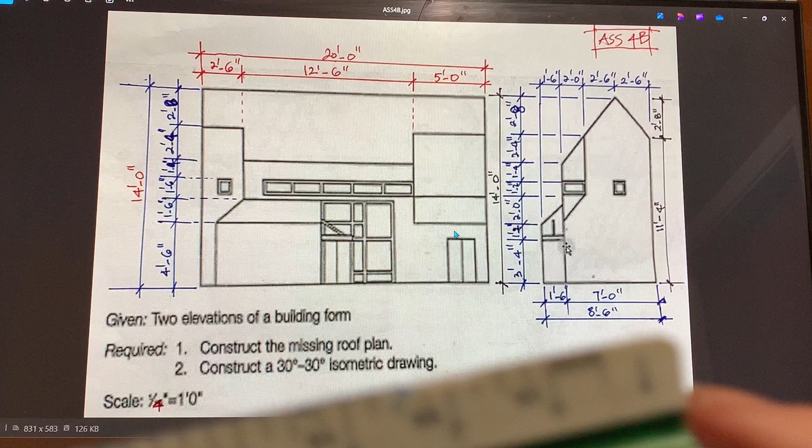This homework we need to use for the scale we want when you draw or measure. So I hope that you still remember the scale 1/4. When you see 1/4 at the top, this is 1 foot.

So now if you look at this is 1 foot, follow this one to read the number in feet. And if something is not an even number of feet, you can use the divider right here to measure the inches. 1 foot equals 12 inches.

You see the long dash and the short dash stand for inches. 1, 2, 3 inches, 1, 2, 3, 1, 2, 3, until 12 inches. 1 foot equals 12 inches.

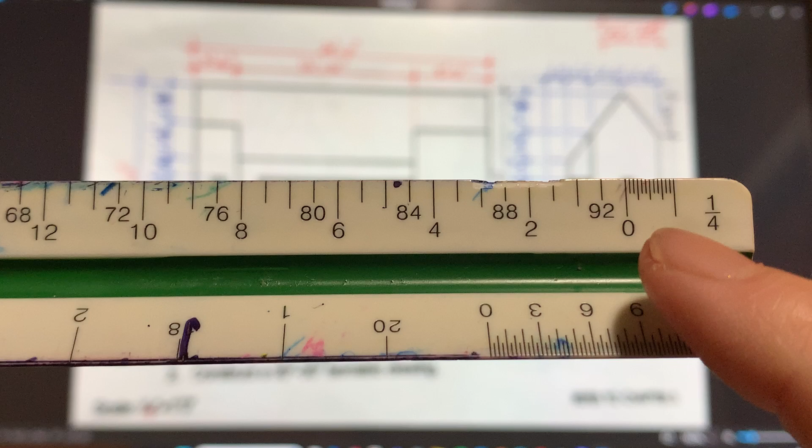And this homework we use the 1/4 scale to measure and draw. So first of all, you need to measure all of them from the scale 1/4. You need 2 parts: the first one, they ask you to create the roof plan, and the second one you draw with isometric at 30 degree.

So that's why first of all they give you the front elevation and the side elevation. You need to measure each of them before you start the roof one, like homework number 2. So you need to create the roof plan.

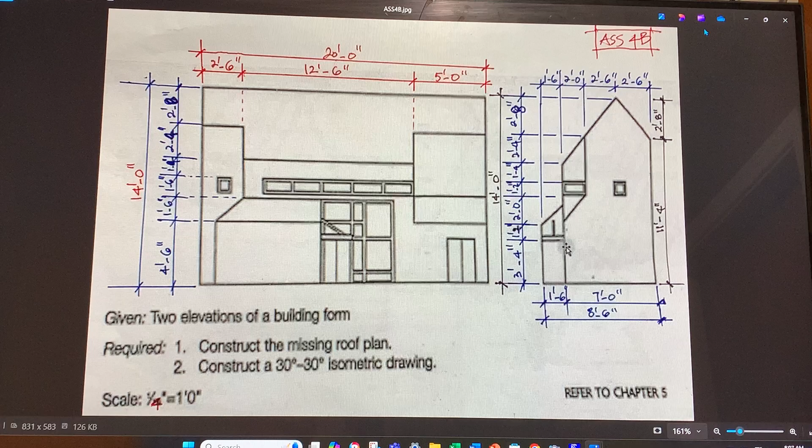So on the dimension right here, you need to measure with scale 1/4 like I told you. And you need to write it down to make sure that you use this one for reference when you draw the roof plan and the isometric later.

So now first of all you need to draw the roof plan. I have information for you on how you do the roof one like this.

Okay, so after you have the dimension, you can create the roof one on the top. I gave both of them so you can see the roof one at the top, and this is the one they give you. After you have the dimension, you use that dimension to draw this one.

For example, the longest one is the roof, and you need to draw the roof right here with the longest one. After that, from the side one, you can follow this one to do the side, the top ridge right here. That's it, the top ridge right here.

And after that, divide the 2 small ones. This is divided into 2 small ones. If you stay here to look at this side, you can see the top ridge right there.

And after that, slope down. Slope down here, and another slope down, another slope down, and go straight with the wall right here, go straight.

And this one is the part, when you stay here, you look at this part right here on the side. Okay, so this is the side one, and then in the front one, you can see the slope right here. So you see the little bit of gap right here from the first one right there.

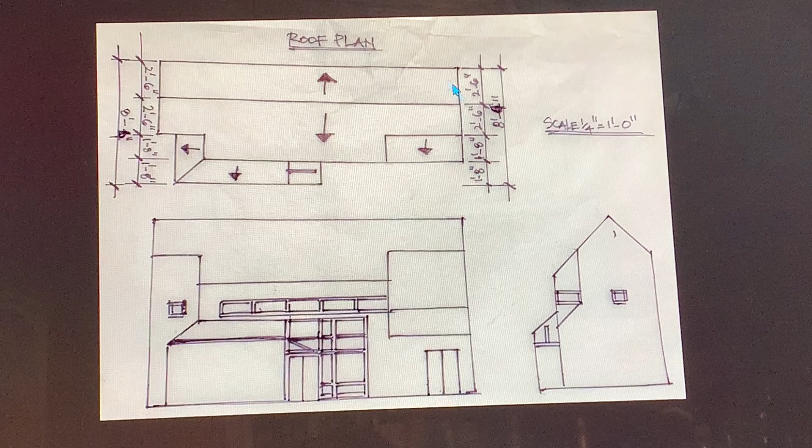Okay, so this is the second one you need to draw. Now we need to go step by step. After you finish the roof one with dimension right here, you go with step 1 like before, you create this. You need to do for step 1. Step 1 is the one like I told you, you need to create the dimension, 3 side dimension.

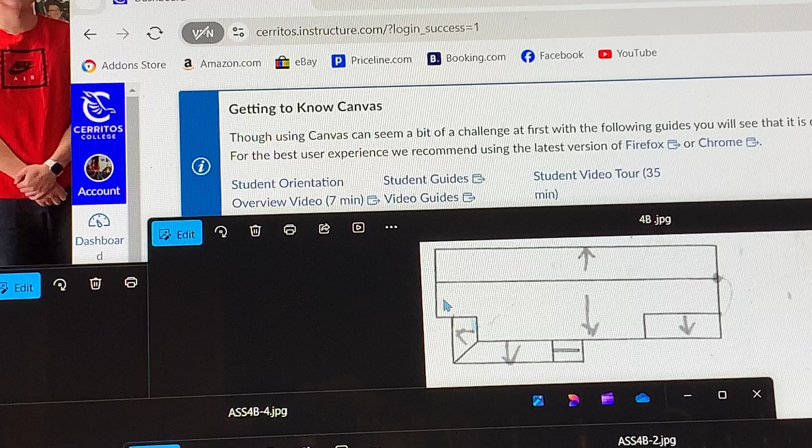Let me see. First one, you need to create 3 side dimension like this. That means you need to create horizontal line, vertical line, and after that the angle line with 30 degree. That's the first one, 30 degree left or right. This one. After you create for horizontal, vertical, and after that you create for this one.

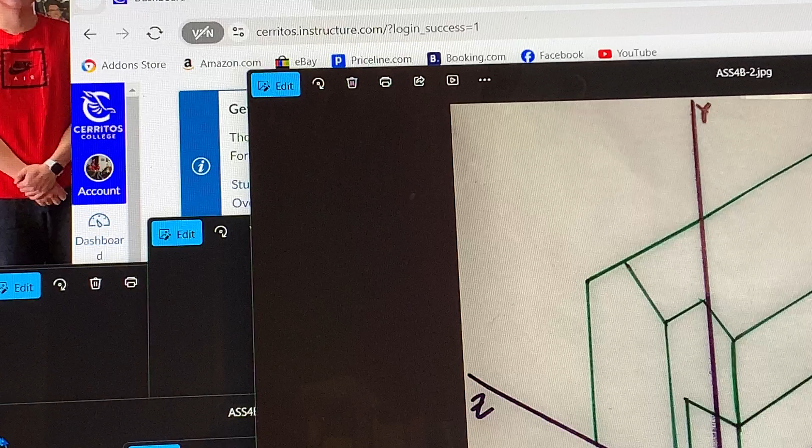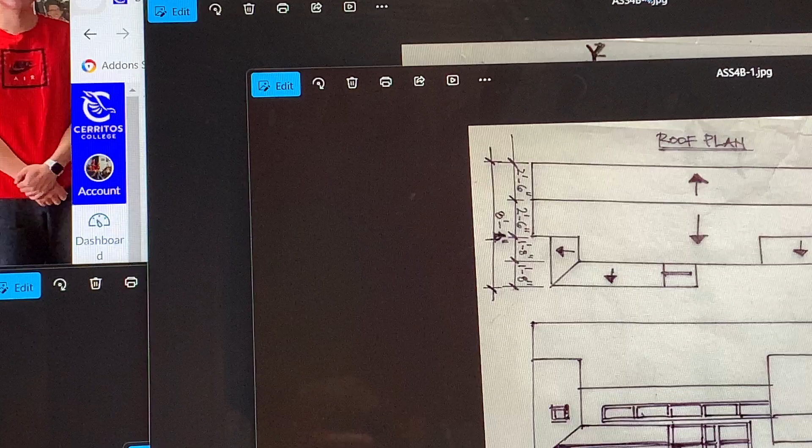Let me see, I have something, the basic for you can follow. Okay, this is very beginning. Let's zoom bigger so you can see that.

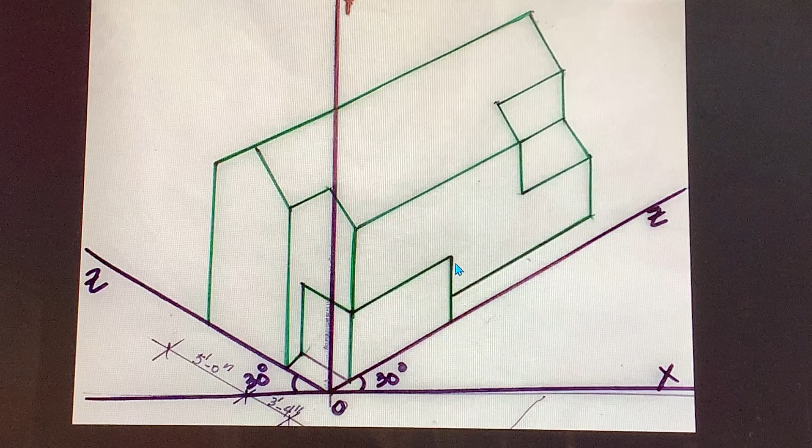Okay, so after you create for horizontal X, vertical Y, and the angle line Z left, Z right, 30 degree, and you need to start with dimension. After that you have dimension how high from the first one, from the first roof, and how high from the tall one. So all of the information they give you before, so you need to measure. Like I give you the one with dimension, you need to see that one before you do.

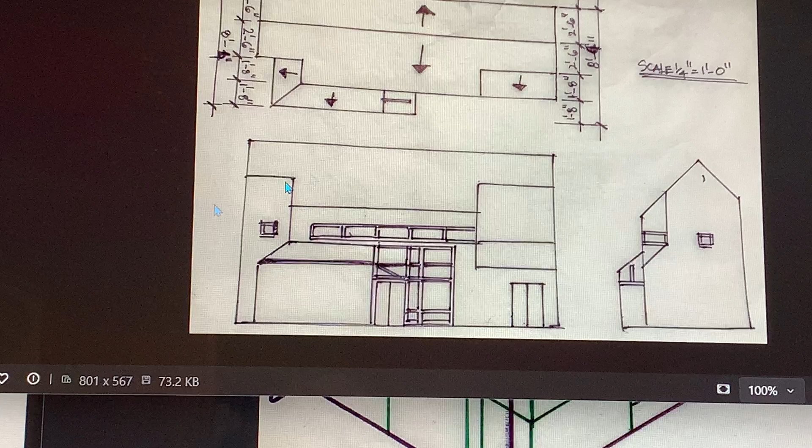This is the whole thing for the roof one, the slope roof with dimension on the right side, and the other one I give you dimension from the other one. Not this one.

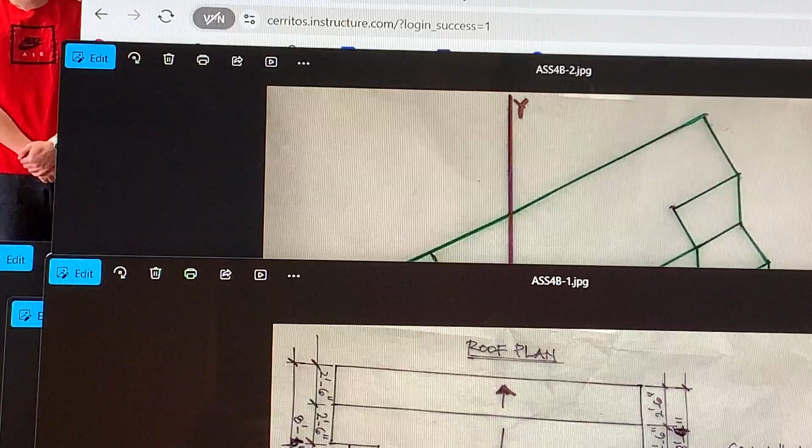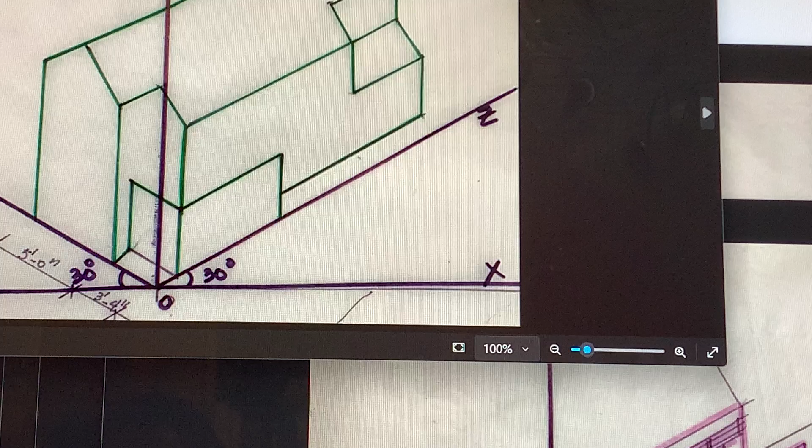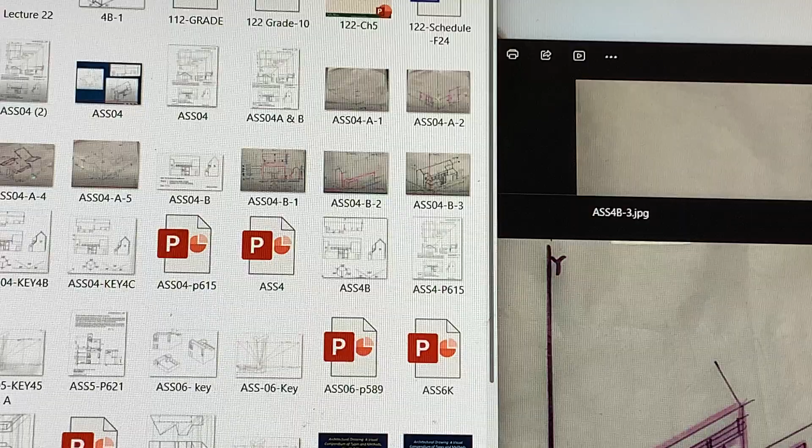Let me see something I can show you very quick. Okay. I remember I put outside here for all of dimension, so you can see very easy when you start to draw.

Anyway, you can start to draw this one with dimension. When you measure from the top one and the second one on the given elevation, you can measure from there to here, how high is it. And you draw, this is parallel with the Y one. You create this one and the top one with the dimension.

I think I have done the form, I mean the image. But let us see. Something is on there. Where is my phone?

Okay, so that's why you can see on a dimension. I don't know, where is dimension? I need to share with you. Here. Okay, so this is on dimension, you can see that. This is on dimension. After you measure like this one, and you have dimension like this, and you use this dimension to draw for the isometric. So on of dimension you see like this.

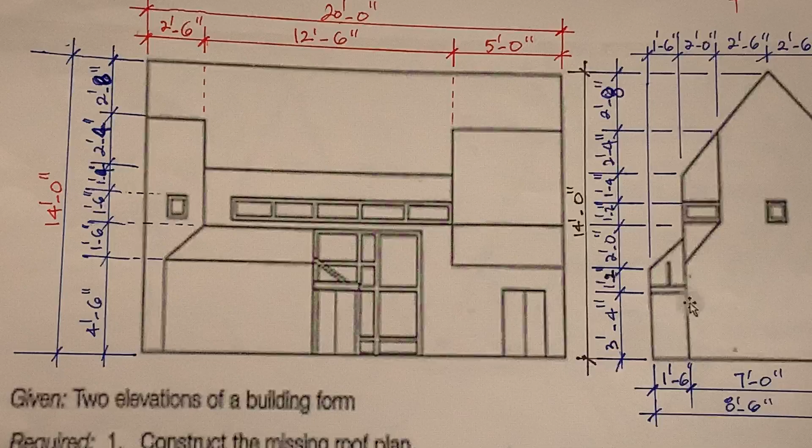Okay, so after you have dimension for how high from each of the point, the main point, for example right here, right there, and after that you can use it to do for on of the detail when you draw on of dimension right here.

Okay, so the first one you need to draw the straight line, the one is parallel with the y-axis, and you draw on of them with dimension like this, like this, like this, and after that you combine. When you draw the roof one, it should be parallel with the z one, z right, like this. It is the floor level, and this is the low roof. You need to draw a parallel line with the z one.

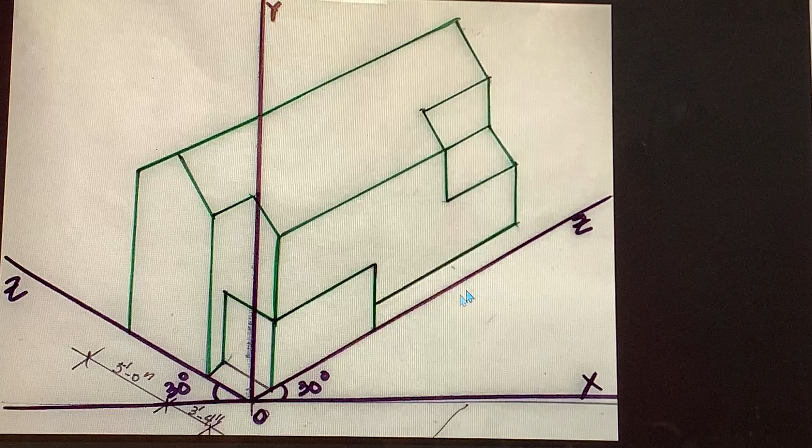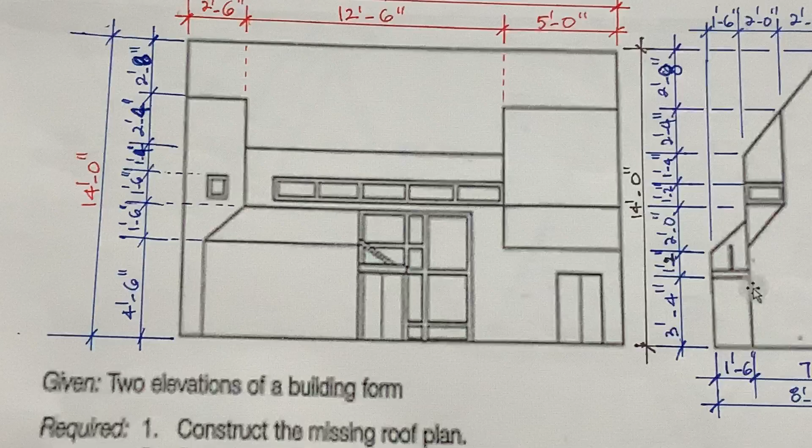After you create this one, you continue with the second part, the second part with more detail. You need to draw on the low roof one here, the low roof one, and on of the dimension again. You can use this one to draw for dimension on here, on the right side. On of dimension on the right side right here, and you can draw that on here. How slope is it, and how high from the small roof, and how wide from each of them. So on of dimension right here, you can use that and you draw this one.

Okay, so after you draw this one on the window or the glass storefront, you decorate outside, and the one hanging right here, you can see the top one on the roof line. This is the door, so you can measure and draw this one.

Don't forget, when you draw the door, the header should be parallel with the z-axis and parallel with the floor one, and the straight one is parallel with the y-axis. So on the line right here, you see the parallel one.

This shows everything on the roof line and the elevation when you see the side one. On the storefronts right here, the glass window, you need to draw parallel with the y-axis, and this one with the z-axis. When you draw this one, it should be parallel together.

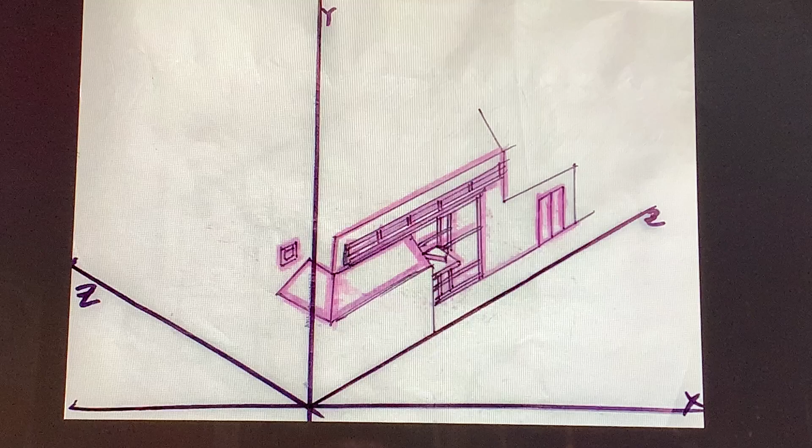Okay, so after you finish this one, you need to combine both of them together. This is either one, you have both sides. I keep the same color so you can easily look at this.

The green one is the roof, when you begin to draw, and the second one, after the first one, you need to continue with this for the small slab roof, and after that the storefront with the glass and the overhang right here. So after you finish this, you can combine together.

And this one is the final. I need to see that. Don't forget, the scale we use is the 1/4 scale when you draw that. And you need to start step by step, do the roof one first.

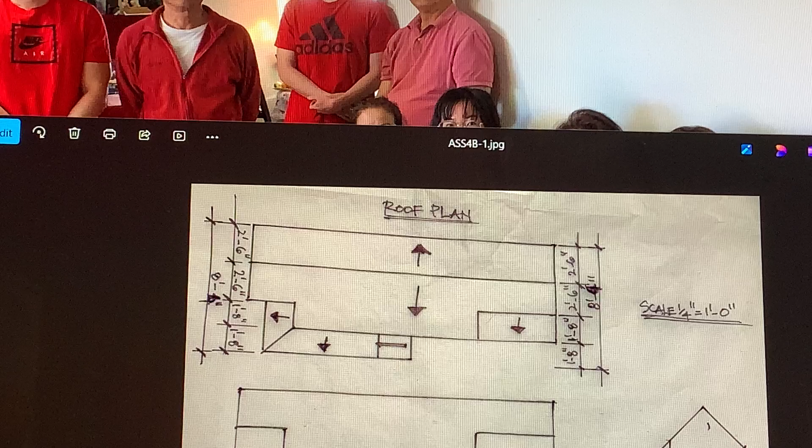After that, this is the roof one. You need to draw the roof first with one of the dimensions. When you look at this side, you can see this side is the same thing. When you look at this one, this side elevation looks like this, and from here you can start to draw the roof, how wide, how high you need to measure.

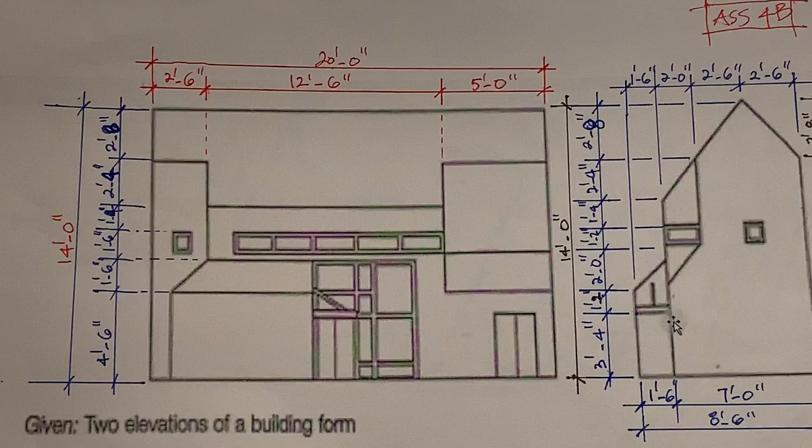And again, this is the measuring from one of them. You need to draw to measure by scale 1/4. Okay, so when you have this one, you can use the information right here with dimension, the given dimension.

And after that, you can start to do isometric at 30 degrees, 30 degrees, after you create this. Okay, so this was step by step. You need to follow that one. This is instruction for you to follow.

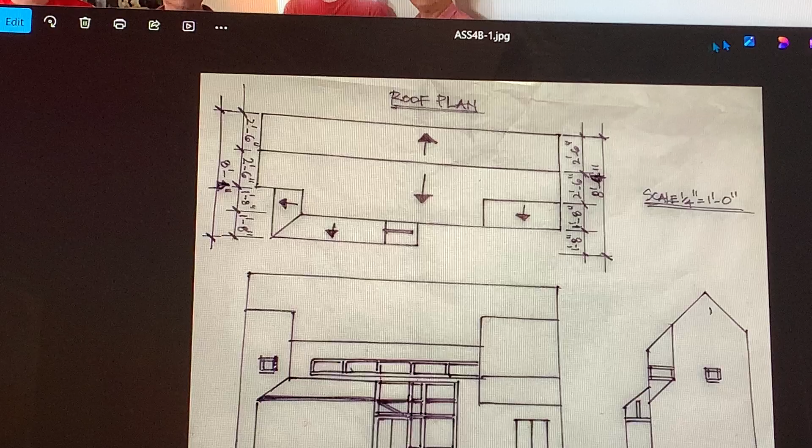So if you have any question, you can ask me during the last hour in the lecture. I'll try to post this today, so you can use it as a reference when you draw that. This is the one before you create 30 degrees for the y-axis and the z-axis before you start drawing.

Okay, so finally, this is the one I want to see with one of the dimensions. This is the first step when you start to do one of the roof lines with the straight line perpendicular, or the straight line parallel with the y-axis. This is creating 30 degrees, and one of the dimensions you need to follow before.

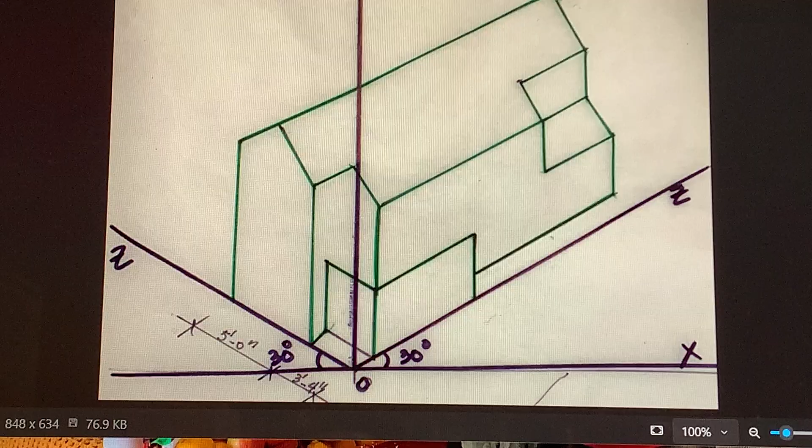So you need to do step by step, like part A. You can do that on final, and I want to see the final like I shared with you before. Okay, this is for part B, and this is the final, the one I need to see all of them plus dimension. When you show me this one with dimension, the first part is the roof one.

For part B we have two different ones, the roof one and this one. This one they call isometric. You need to show me this one and the roof one with the scale 1/4.